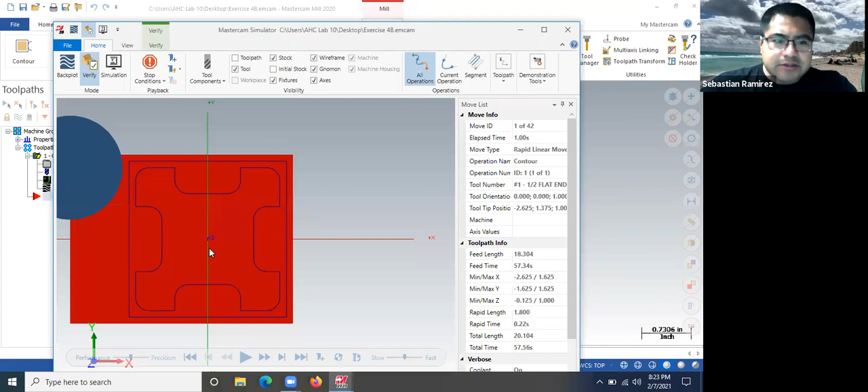Right now, what we see when I go to the verifier is a default thing set up for the Mastercam. We didn't mess with that, I didn't show that. So when we hit play here, it leaves all of this material.

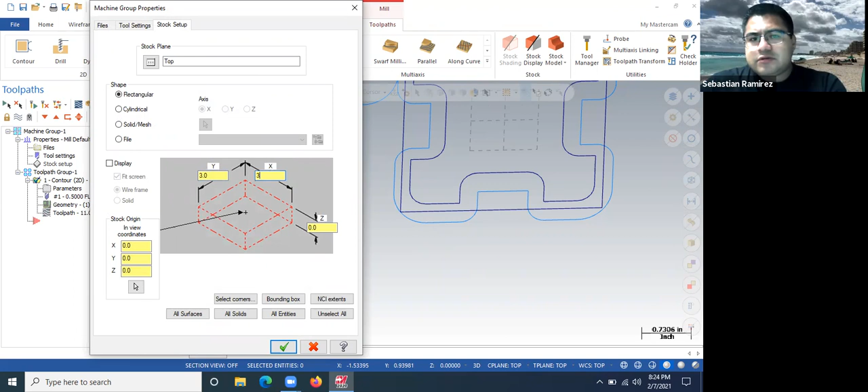So yeah, I'm gonna go ahead and close that. I'm gonna go and define our stock setup. The part is 3 inches by 3 inches, I believe it said it was a 1/4 inch. So I'm gonna go define that. I'm gonna double check that again in the verifier, just to make sure it looks better. So that's 3 by 3 if it's the program that we have on that stock setup.

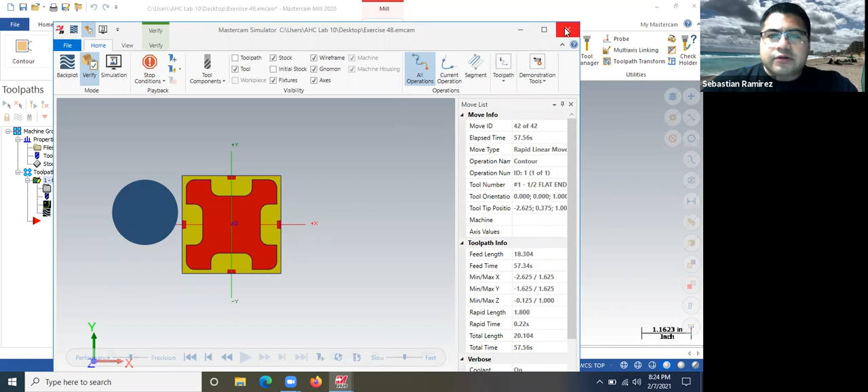So now the only 4 little sections we have to worry about are those ones right there. And I'm thinking out loud. I'm gonna go and analyze the distance from here to this edge right here. It's saying it's 1/8 of an inch, 125 thou.

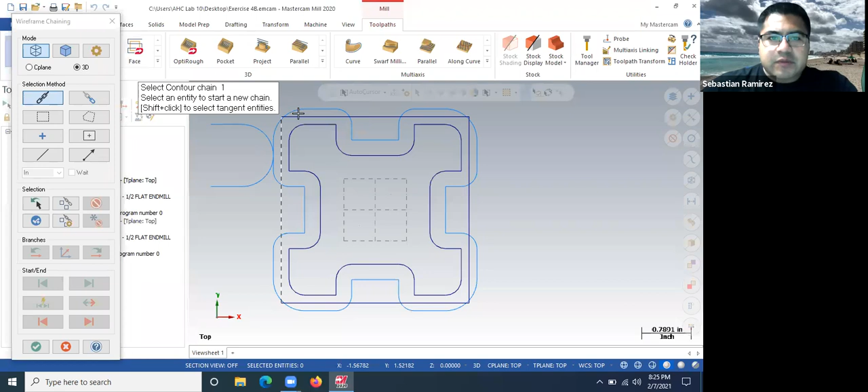So boom, what I'm thinking to do for it is go back to toolpaths, contour again. I'm going to try this and see what happens. I'm going to select this outer box now, call that contour, same tool, cut parameter. But instead of being to the right or to the left, I'm going to go down to the center right here under the cut parameters.

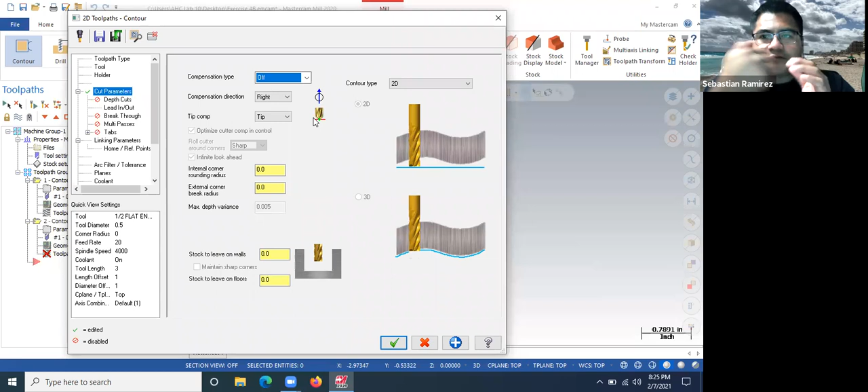I'm going to turn this compensation off so it's going to be right in the center. So I'm only going to cut—since it's a 1/2 inch end mill, it's going to cut 250 on each side—let's see what that does.

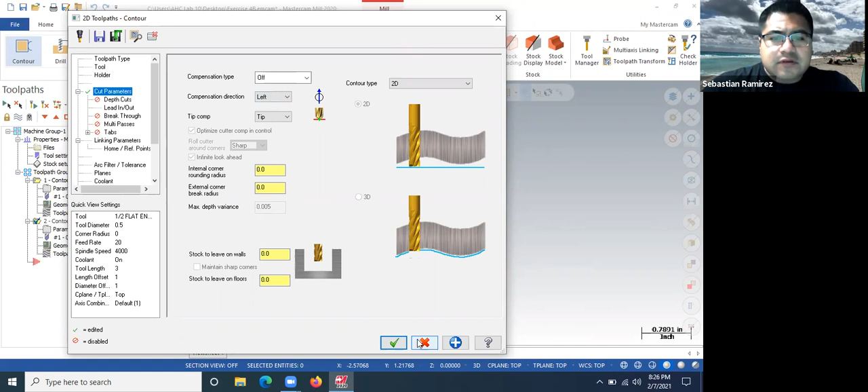So I verify that. It looks like it's starting on the inside, so I'm going to have to change that parameter, go to the left. Oh, it's on the outside. Regen it.

Double check that, see what it does to the stock. 125, 120. All right, so that's going to cut too much material, as I can see right now.

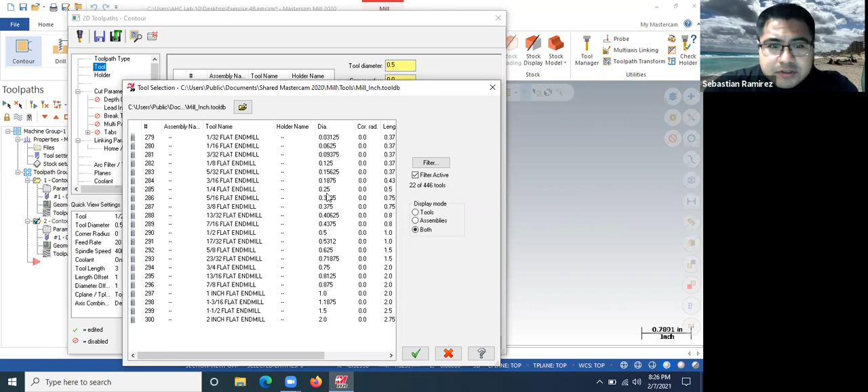So instead of using a 1/2 inch tool, I'm going to use a 1/4 inch tool. Instead of it being a 1/2 inch, which is 500 thou, I'm going to go half of that, which is 1/4 inch, 1/4 end mill.

I'm going to keep everything the same. I'm going to call it tool 2. Then keep this the same way because it's the same wireframe. Regen it. Okay, hopefully this will take care of that for that little outer part.

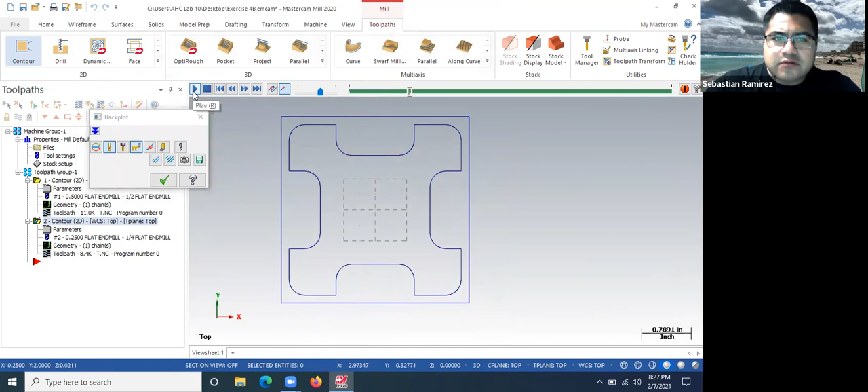All right, so that goes right up to the edge of it. Only other thing I'm going to check is the linking parameters, that the absolute is 1 inch, 100, 100, 0. Go to a depth of, I think it was 125, the last one. So I'm going to hit that.

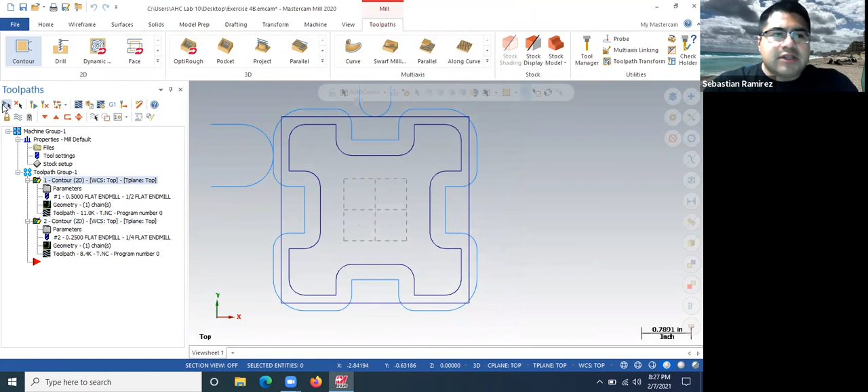Regen it. Now I'm going to select control, select both of these—or if I select this arrow, it selects both of them. I'm going to go back to the verifier to see if that takes care of that little notch. That's the first op, and there went the second op, which we can see that it did without messing the integrity of the part or the features of it.

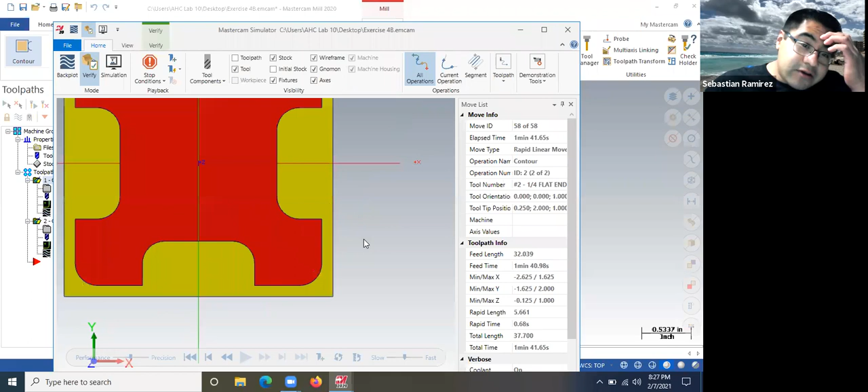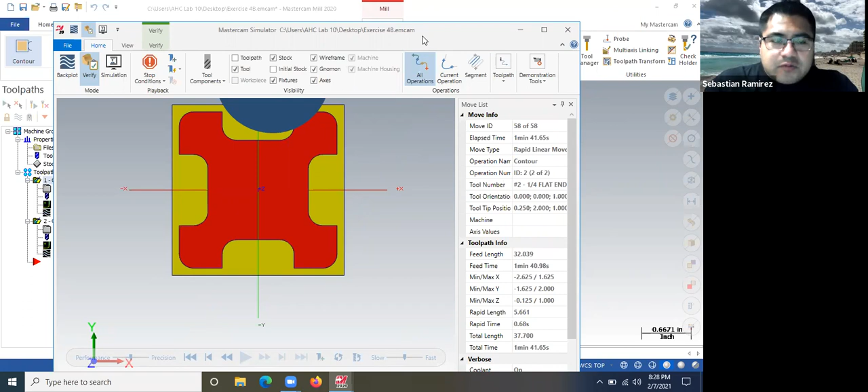I guess realistically, it might have a little bit of chatter because we're rerunning that same little edges with a 1/4 inch tool. The distance from the outermost edge to here is 125, so that tool is running right along these edges. But for this lesson, for this exercise, I think that'll suffice for what you guys need to do.

Change the color so you can see it again. I'm gonna go back, slow it down a little bit. Play—it goes one way, and the next one goes and removes that remainder of it, without ruining the part much.

So that should solve that problem. Same thing, we're gonna turn on the coolant, etc. So I'm gonna stop there.